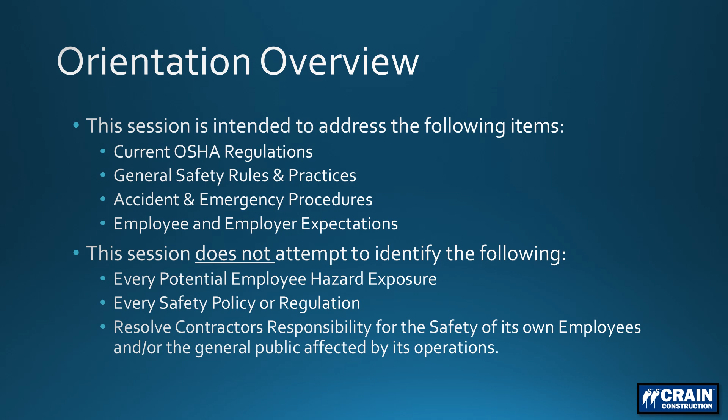Crain Construction has called Nashville home for over 90 years, and has completed over 4,500 projects in the greater Nashville area. Here at Crain, we believe every project starts with a strong foundation. One of the most important pieces of that foundation is safety.

Here at Crain, we believe safety begins at the top, but also involves a daily commitment from everyone working on our projects. Crain Construction considers accident prevention to be a key element of successful daily operations. Here at Crain, we strive to provide everyone on our sites with a safe and healthy workplace. We also expect everyone to participate in this process, by ensuring all operations and activities are performed in the safest manner possible, and consistent with quality construction, environmental safety, and best management practices.

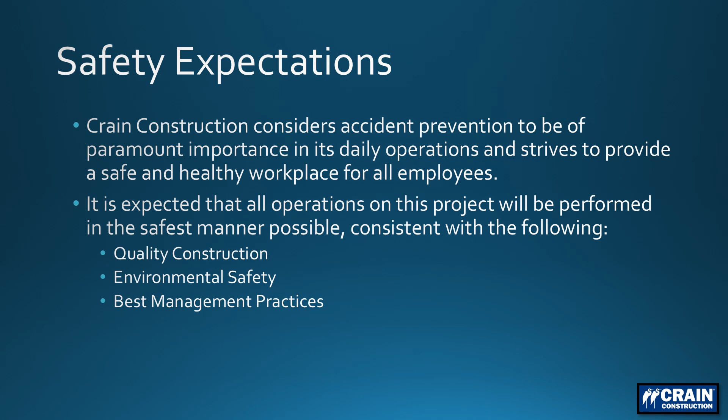Here at Crain, we have a term, achievable goal. We expect all of our employees to keep one goal a top priority every day when they come to work on our projects: achieve an incident-free work environment and ensure all employees go home the same way they arrived to the job site. The realization of this goal depends heavily upon you, the employee.

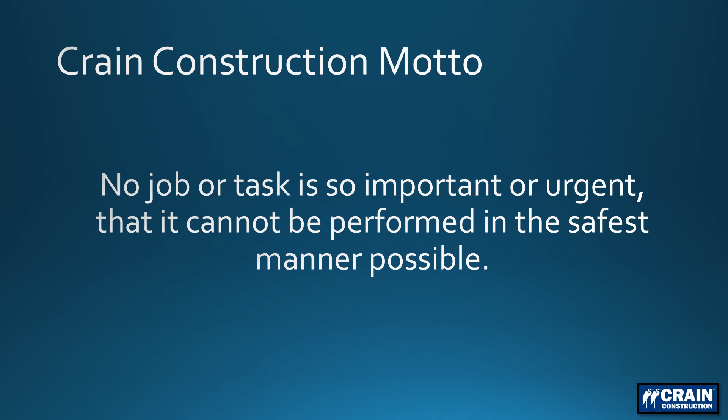You can help be a part of this goal through active participation, coordination, and cooperation with your companies, and Crain's safety and health policies. A commitment for safety starts with each of us, and here at Crain we have a motto: no job or task is so important or urgent that it cannot be performed in the safest manner possible. We expect all employees and management to incorporate this motto into their work, pre-task planning, and during their active work operations.

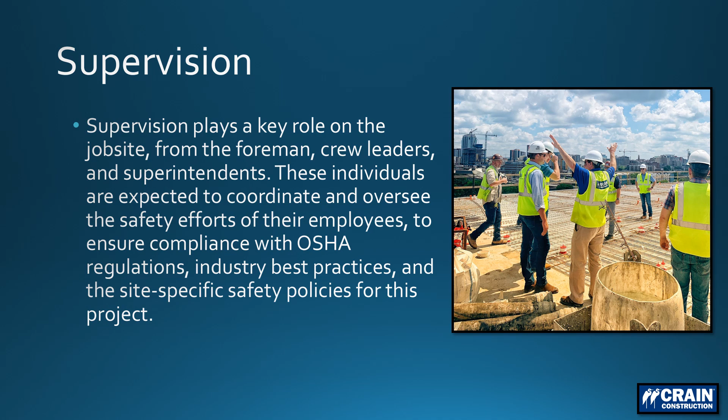Supervision plays a key role on the job site from the foreman, crew leaders, and superintendents. These individuals are expected to coordinate and oversee the safety efforts of their employees, OSHA standards and regulations, industry best practices, and site-specific safety policies for this project.

The next few slides will provide you with a breakdown of a few of the most common hazard areas we experience on a day-to-day basis. Although you may not be responsible for the implementation of each task, it is important that you understand the safety regulations involved, as hazards from other trades can impact all personnel on site.

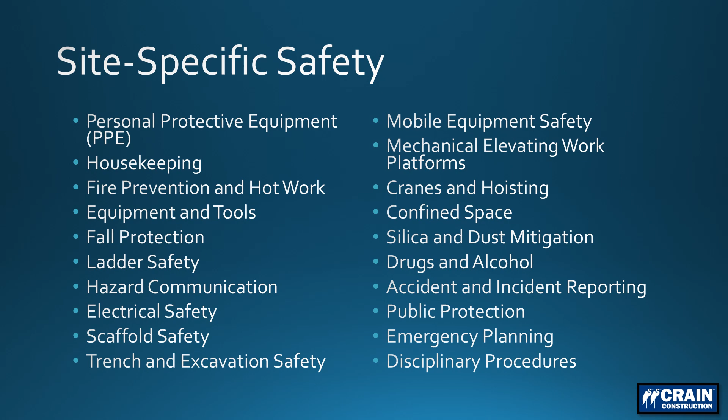Crain requires employees to wear the following items at a minimum while working on our job sites. These items reflect our sense of professionalism and industry-leading standards. Therefore, all employees are required to wear a minimum of long work pants, work boots, and shirts, with at least a 4-inch sleeve. Clothing illustrating wording or pictures that could be considered profane are strictly prohibited.

Personal protective equipment is a requirement while working on the project, and is an essential component to preventing our employees from being exposed to hazards. The minimum requirement for PPE on the project is long pants, work boots, high-visibility clothing, hard hat, and safety glasses.

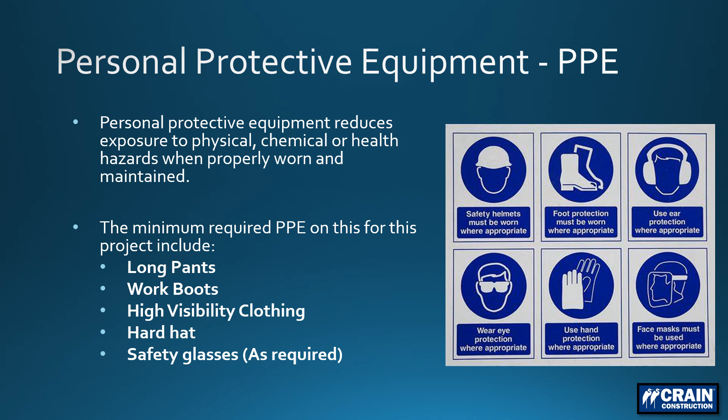Hard hats worn on the project are required to meet the industry head protection standards set forth in ANSI Z89.1. Hard hats are to be worn at all times by any individual entering the job site. No non-approved items are allowed to be worn underneath your hard hat. Examples include beanies or ball caps.

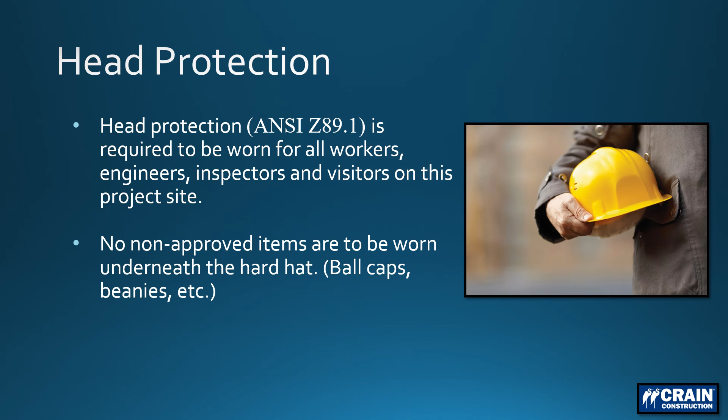Safety glasses are required to be worn by all individuals exposed to eye hazards. This eyewear must meet the ANSI Z87.1 standard. If employees choose to wear prescription glasses, they must meet the ANSI Z87.1 standard. These requirements include shatter resistance and protective side shields.

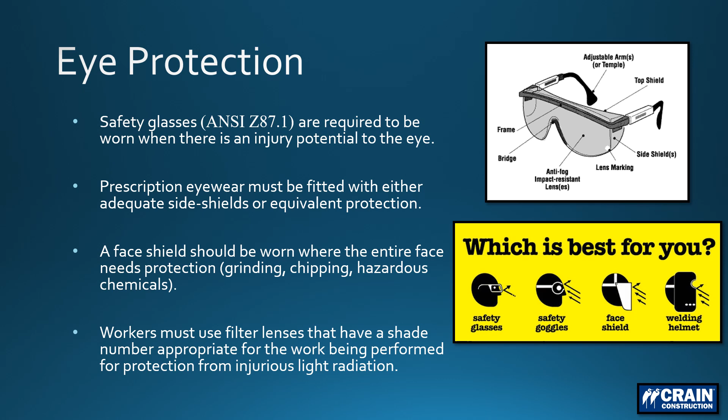If employees are working with items that could possibly strike the face, they are required to wear a face shield, along with approved safety glasses at a minimum. Examples requiring a face shield include grinding, chipping, or working with hazardous chemicals. Specialty work may require additional items, such as a welder's helmet. If you have a question regarding which type of face protection you will be needing, consult your supervisor.

Hand injuries are one of the leading causes of incidents in the construction industry. It is very important that employees understand the hazards associated with the tasks they are performing. Different gloves are used for different tasks. The most common types of gloves are broken down into 3 categories: nitrile, latex, and coated gloves.

Nitrile and latex gloves are best used for chemical hazards such as concrete burns, acidity, and other chemically reactive substances. Coated gloves have a wide range of uses, including cut resistance, shock absorbance, pinching hazards, cold weather, heat resistance, and electrical hazards.

Before performing a task, you need to ask yourself, what hazards am I exposed to? This question will help you pick out the right glove for the task.

Additional PPE can be required depending on the task being performed. Individuals performing specialty tasks should be prepared to use items such as earplugs, respirators, gloves, face shields, safety-toed boots, or additional class high-visibility clothing. These example forms of PPE are required to be worn by all employees working in or around warranting conditions. Additional PPE can also be required when directed by employer supervision or Crain management.

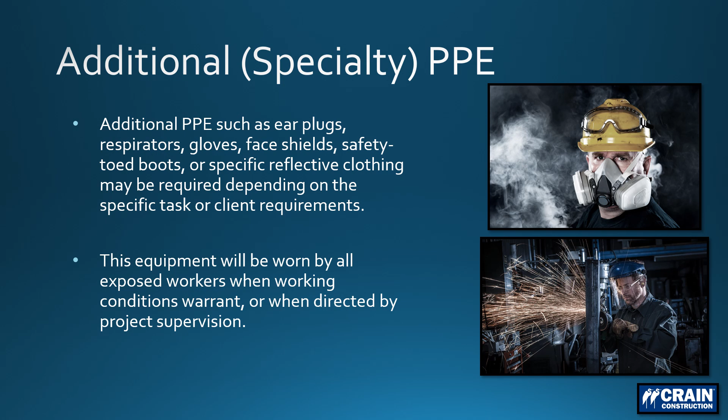In order to have a successful project, we have to keep our sites clean. At Crain Construction, work areas are expected to be kept clean to prevent hazards such as slips, trips, and falls. Trash, debris, and scrap materials must be regularly placed in waste containers or removed from the work area.

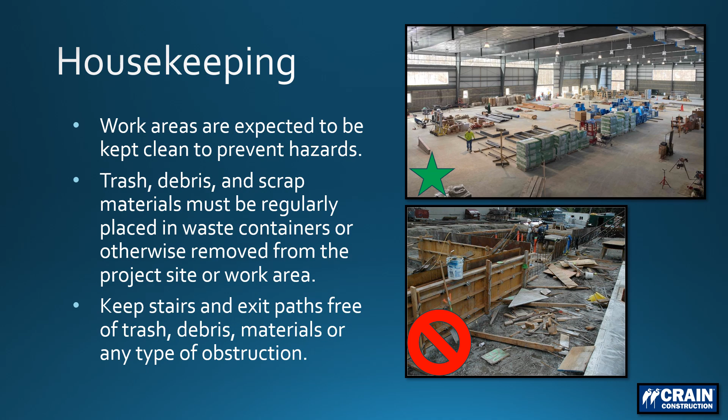Every employee on the job site is required to periodically clean up their work area and ensure all items are disposed of by the end of a shift. All stairs and exit paths are also required to be kept clear of any trash, debris, or excess material. We cannot accomplish this task without your help, so do your part, and take pride in your job site.

Fire hazards can present themselves in many forms, especially when it comes to hot work. Hot work is defined as any work that generates a spark or flame. Examples of this include welding, cutting, grinding, and tar kettles. Crain Construction requires that all employees follow our hot work procedure.

The proper procedure includes the following steps: 1. Notify management of hot work activities. 2. Complete a hot work permit. 3. Establish a fire watch. This individual must be dedicated to only performing fire watch duties. 4. Ensure a charged and inspected fire extinguisher is present in the area.

Additional questions to ask yourself before work begins include: what are my above and below hazards? Do I need multiple fire watches? Is my extinguisher charged and inspected? And finally, have I protected surrounding material and employees from hazards?

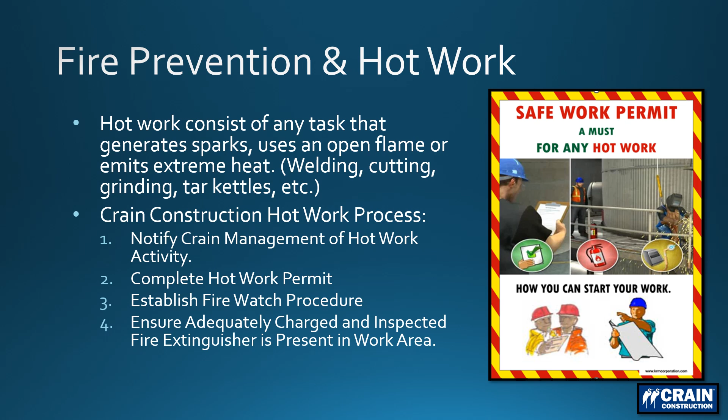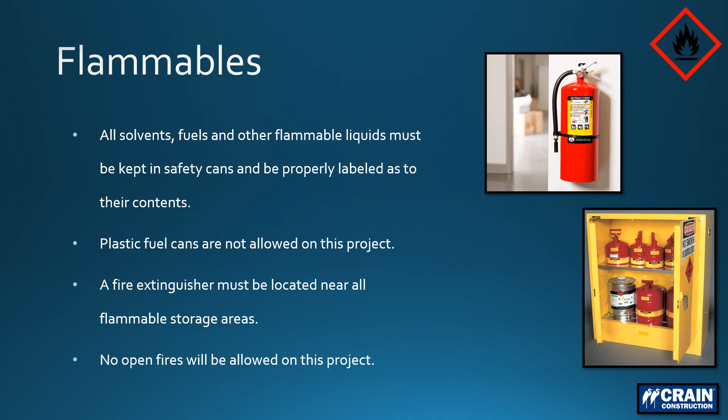Flammable solvents, fuels, and other flammable liquids must be stored in approved metal safety cans and be properly labeled as to their contents. Plastic fuel cans are not allowed on this project. If fuel is being stored on the project, a fire extinguisher must also be located within 30 feet. Crain will also not allow any open fires on an active project site.

Employees planning to use power tools on the job site must ensure they are implementing a well-thought-out plan before use. All tools shall be inspected before use to ensure they are in proper working order. If a tool is recognized to be damaged, it must be tagged and removed from service. Some tools can be repaired, but only when they are repaired by a qualified individual.

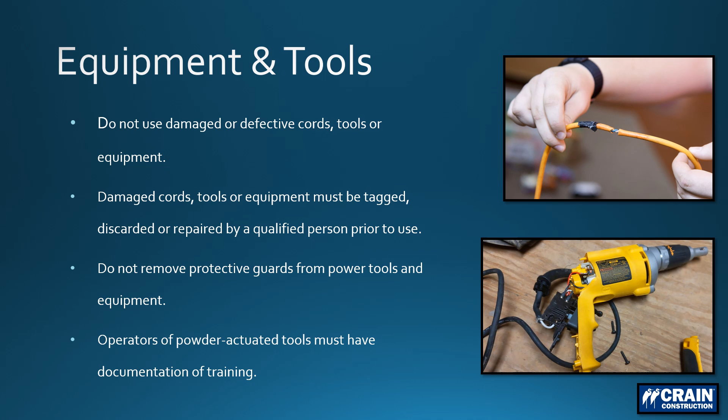No tools are to be altered or modified to perform a task. Individuals who plan to use specialty tools such as powder-actuated tools must also be properly trained and maintain proof of training while working on site.

Falls continue to be one of the leading causes of fatalities on construction projects. Workers performing activities at a height of 6 feet or more must be protected from falling by use of guardrails, safety nets, personal fall protection systems, or other approved systems complying with OSHA regulations.

Crain Construction has a zero-tolerance policy when it comes to fall protection. If employees are observed exposing themselves to a fall hazard, they will be removed from the project. This is a serious work hazard and every precaution should be taken, especially in the pre-planning phase.

Discuss this hazard in detail during your pre-task planning session. Supervisors should ensure that all employees at risk of a fall hazard fully understand the implementation of the fall protection system. If a fall hazard is recognized at any point throughout the day, you should secure the area from a safe distance and notify management immediately.

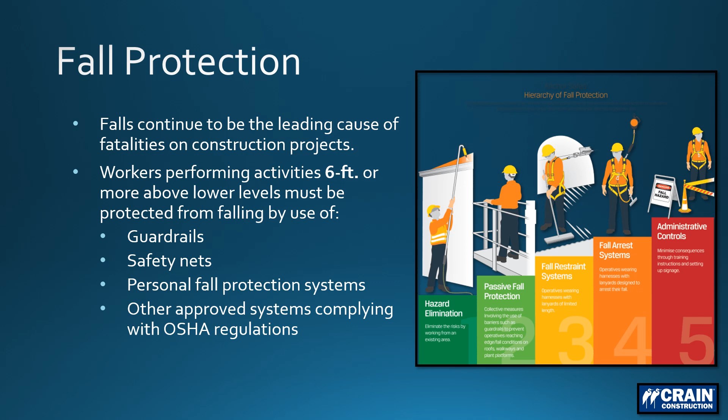Guard railing on our job sites will be constructed to the following requirements set forth by OSHA. All guard rails must consist of a top rail, mid-rail, and toe board. Top rails must be installed and maintained between 39 inches and 45 inches in height. Mid-rails must be installed at 21 inches. Toe boards at the floor must be at least 3.5 inches.

If wire rope is to be used as a guardrail, rope shall be at least 1/4 inch thick, with a deflection no more than 3 inches from the horizontal. Wire rope is also to be flagged every 6 feet. Guardrails are never to be removed without permission from a Crain superintendent or management employee.

Any employee found to have tampered with or removed a fall protection system without permission from Crain management shall be immediately removed from the project.

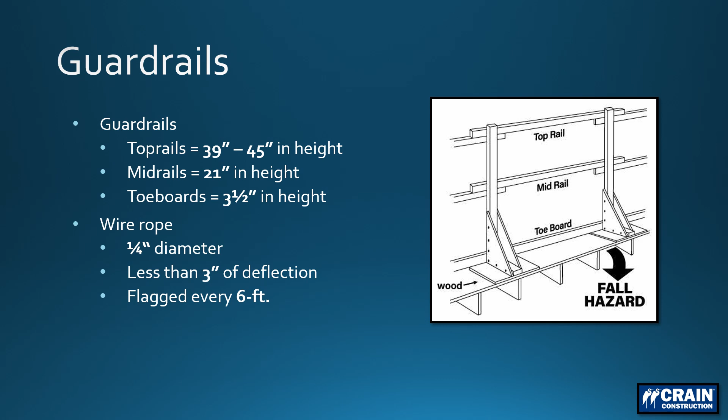In some cases, not all fall hazards can be eliminated from the work process. Crain recognizes that fall protection is an effective tool to implement but can also be dangerous if used improperly. When using fall protection, the first step is to ensure you have had proper training on what you are using. If you have not had training on the fall protection system you are attempting to use, you should not be using it to work on the job site until you have had the necessary training.

Once you have established training requirements, ensure you have an adequate anchor point. OSHA states you need an anchor point capable of withstanding a load of at least 5,000 pounds. Next, you will need to verify you have the correct lanyard or device for the task. The last step is to make sure all devices are given a final inspection. Anchors, harnesses, and connecting devices should be verified to not contain any excessive wear or damage before use.

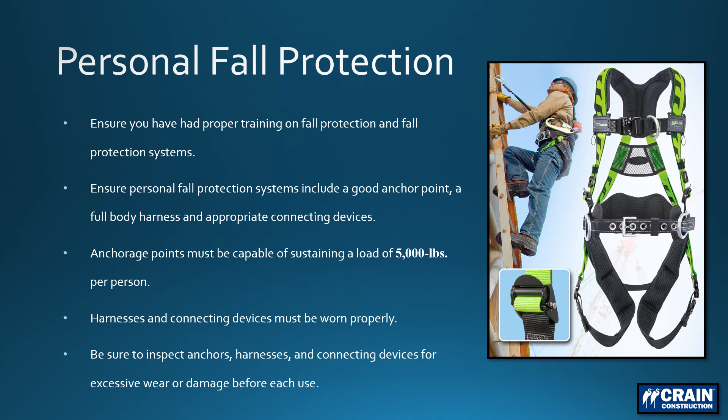Using fall protection equipment can save your life, but working to implement elimination items such as a guardrail or a hard barricade system should always be the main goal of all employees.

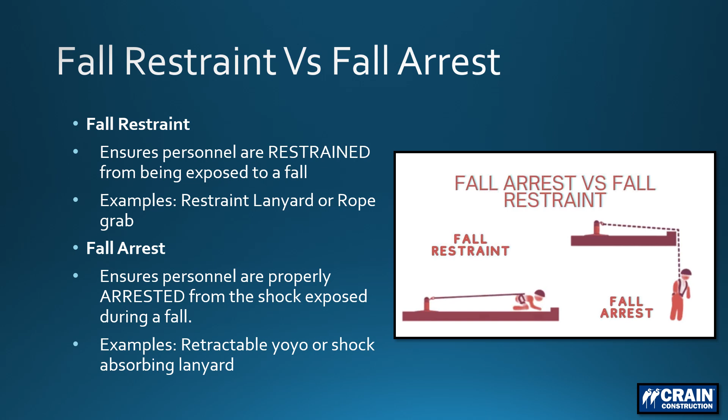Ladders used on the project are to meet the following requirements. Before you begin a task, ensure you are using the correct ladder for the job. For example, if you are working in a tall area, make sure you have a ladder that is adequately equipped to reach your working area safely. If you are accessing another level of a building, ensure you have an extension ladder, as A-frame ladders cannot be used to access other levels of a structure.

The next step is to inspect the ladder. Employees should always make sure the ladder is in good shape and has all of the necessary tags in place. Employees should never modify or alter a ladder's configuration.

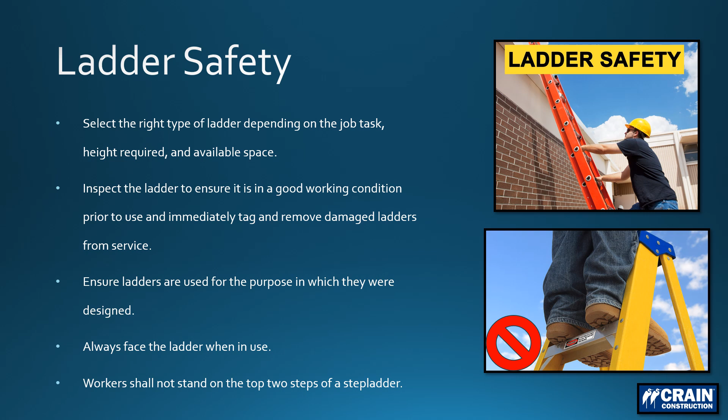A few final tips when working on a ladder: always face the ladder when working, and never stand on the top step or top cap of the ladder.

Extension ladders are a very useful tool, but if used improperly, can also be very dangerous. It is important when using an extension ladder to keep your body within the rails, to prevent accidental displacement. This is commonly referred to as the belt buckle rule. The rule states that an employee should never move their body too much in one direction as to take their belt buckle outside of the space between the rails.

Climbing an extension ladder should be done using 3 points of contact at all times. When traveling to another surface, an extension ladder must extend a minimum of 3 feet above that working surface, and maintain a 4-to-1 angle. There are also additional hazards, sometimes those we cannot see.

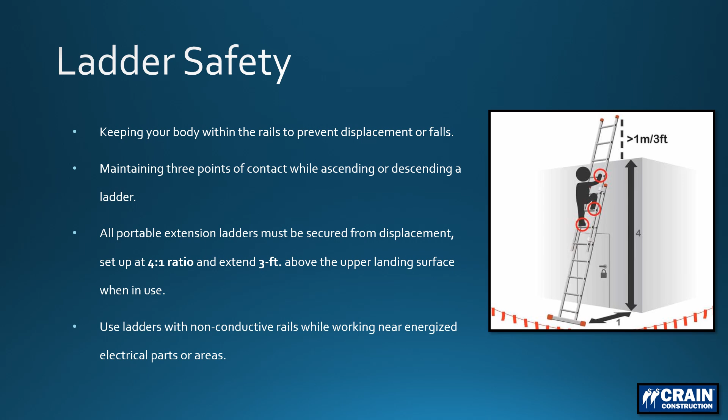It is important for all employees to pay attention to their surroundings before extending a ladder, especially when overhead electrical hazards are present. All ladders being used around electricity should be made of non-conductive material.

Crain Construction requires all of its subcontractors to employ ground fault circuit interrupters, or GFCIs, when using any electrical equipment. It is the responsibility of all contractors to ensure power sources have a GFCI incorporated into the system.

All electrical tools, equipment, and machinery must be inspected daily. If a tool is recognized as defective or damaged, it must be tagged and removed from service until it can be repaired by a qualified individual.

Electrical panels must be properly covered with no exposed energized parts. An example would be a junction box. If a junction box has energized wires, they must be capped, and a cover must be in place on the box. If work needs to happen on a system, employees need to verify that all energized parts exposed to employees are turned off and locked out.

Crain Construction has a zero-tolerance policy regarding lockout-tagout. Any employee found to be working on an energized system will be immediately removed from the project.

When working around items such as high-voltage lines, employees are required to keep a safe minimum distance and incorporate a warning system to the work area. There may be times where work on or around energized equipment is needed, but this must be coordinated with Crain management before work begins.

Scaffolding is a very useful tool and can be found on about any construction project. Safety when using these items is of the utmost importance, and Crain Construction expects all employees and subcontractors to abide by all proper safe work practices.

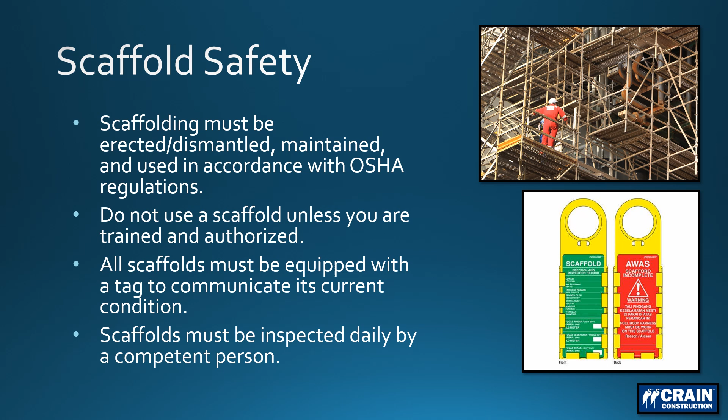Excavation safety. Before digging commences, all utilities must be properly located using items such as ground-penetrating radar or hydrovacuuming. If a utility is known to be near or in a trenching area, it must be located by hand before using mechanical means, such as an excavator.

Before working in a trench, the trench must be inspected by a competent person. The competent person shall determine the level of safety measures for employees working in the trench. The competent person is also required to inspect the trench on a daily basis, before employees are allowed to enter.

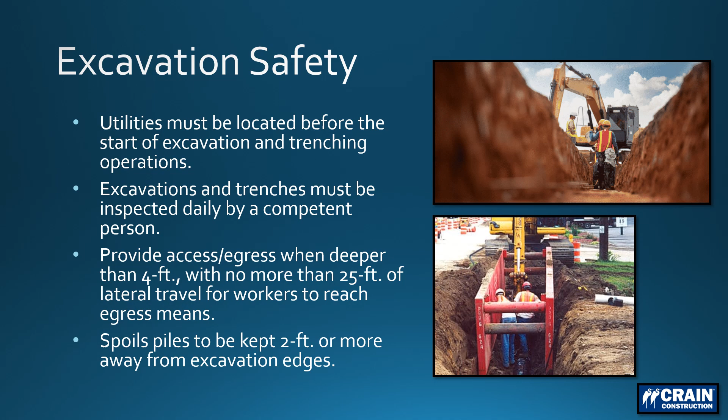Employees accessing a trench that is greater than 4 feet in depth are required to maintain access-egress points every 25 feet of lateral travel. Spoil piles shall be kept a minimum distance of 2 feet or more away from excavation edges. Excavation and trenching operations must be in accordance with OSHA regulations.

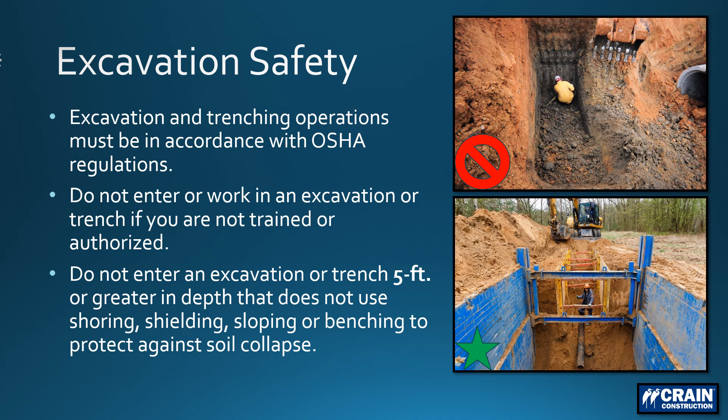Do not enter or work in an excavation or trench if you are not trained or authorized. Do not enter an excavation or trench 5 foot or greater in depth that does not include protective measures to prevent soil collapse, such as shoring, shielding, sloping, or benching.

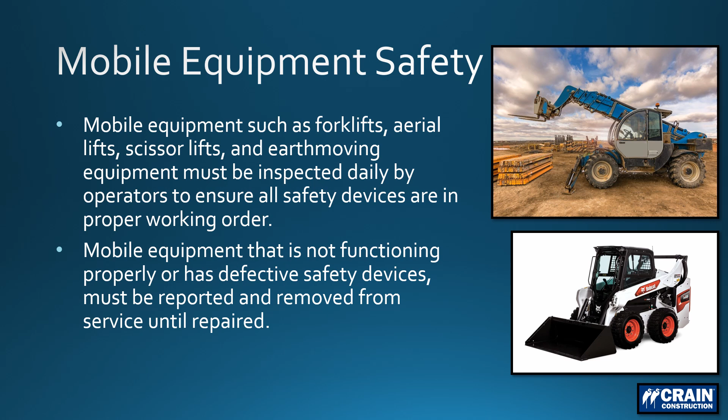Mobile equipment used on the site, such as forklifts, aerial lifts, scissor lifts, and earth-moving equipment, must be inspected daily. Operators are required to ensure all safety devices are in proper working order before beginning work. Any equipment found to be defective or damaged shall not be used until proper repairs can be made.

Forklift operators must be authorized by their employer and must always maintain proof of certification while operating equipment on the job site. Extreme caution should always be taken when working around mobile equipment. Employees planning to work around equipment should always ensure eye contact has been made between themselves and the driver before entering the operating zone.

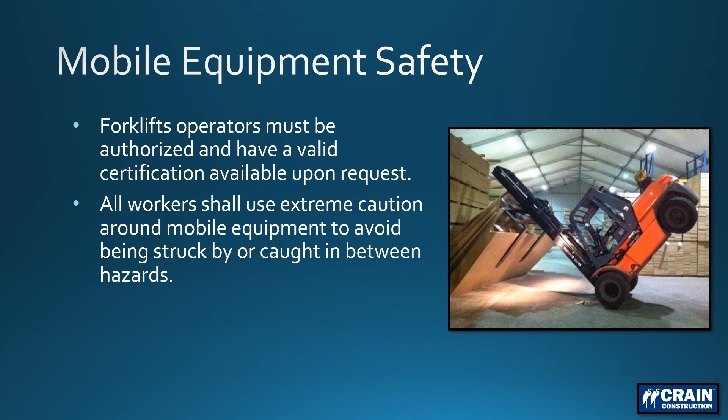Only trained and authorized workers shall be allowed to use mobile elevating work platforms. Workers must keep their feet on the floor of the platform at all times and are not allowed to stand on the railing systems. Before beginning operations, safety chains and gates must be latched in the secured position. Personal fall protection equipment shall always be used when operating a boom lift.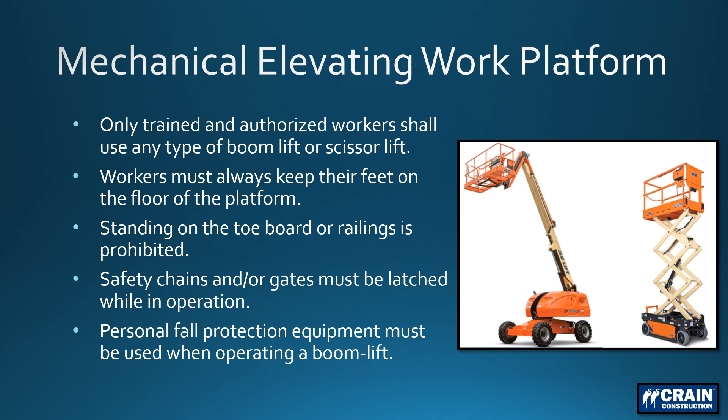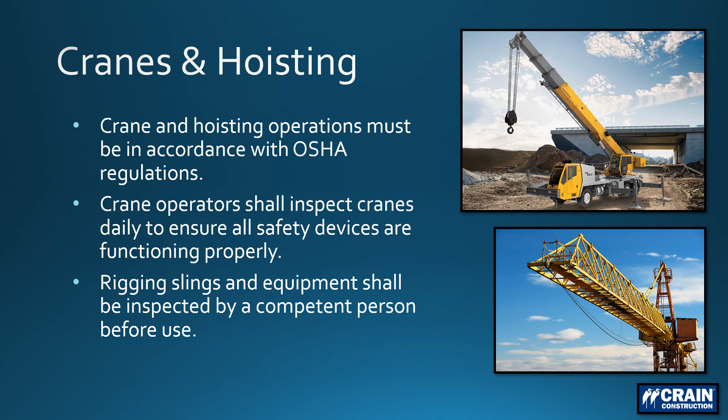All cranes on site must be maintained in strict accordance with OSHA regulations. Before a crane is allowed to work on site, the following minimum pre-construction criteria must be met. First, certification for the operator and crane designated for use must be provided to Crain Construction. Second, crane operators are responsible for inspecting their equipment daily to ensure all safety measures are met and devices are functioning properly. Finally, all rigging slings and equipment shall be inspected by a competent person before use.

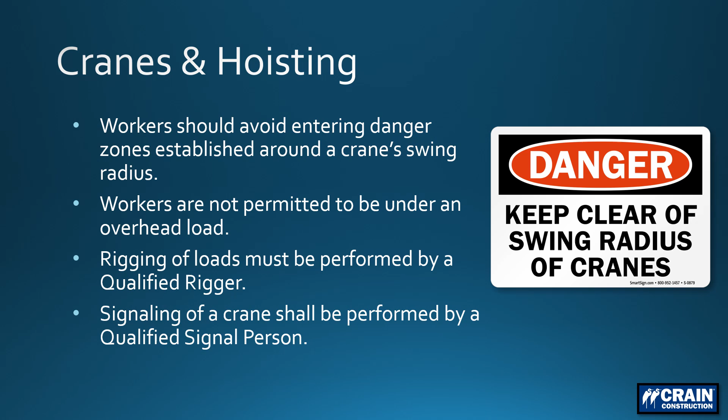Cranes and hoisting continued. Operators are required to set up work control zones to notify surrounding workers of hazard areas. Workers are never allowed to be under a live overhead load. All rigging of loads shall be completed by a qualified rigger. All signaling shall be performed by a qualified signal person. Proof of certification for both rigging and signaling must always be made available while working on the job site.

Confined space entry operations shall be in accordance with OSHA regulations. All confined spaces on site shall be deemed permit-required confined spaces until proper inspection criteria have been met. Only trained and authorized workers shall enter a confined space. Confined spaces must be evaluated daily by a competent person to ensure all existing hazards have been mitigated or eliminated.

Permit-required confined spaces shall have the permit posted in a readily accessible area during work operations. If employees are planning to enter a space, proper rescue procedures need to be in place, such as a rescue team or a tripod retrieval system.

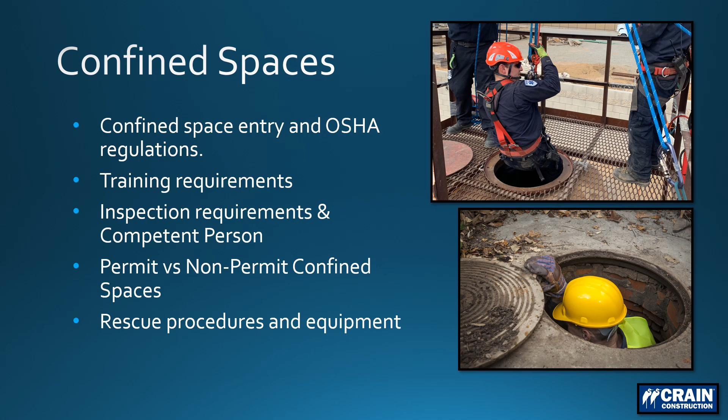All crews involved in activities which generate silica dust, such as concrete cutting, drilling, and grinding, must implement exposure controls to protect workers from airborne respirable silica. Employers can either use a control method described in Table 1 of OSHA's silica standard, or they can measure workers' exposure to silica and independently decide which dust controls work best to limit exposures in their workplaces to the permissible exposure limit, PEL.

Table 1 matches common construction activities with effective dust control methods, such as using water to keep dust from becoming airborne or using a vacuum collection system to capture dust. In addition to water and/or vacuum controls, some activities might require the use of respirators per OSHA's Table 1.

Employers who correctly follow Table 1 of OSHA's silica standard are not required to measure workers' exposure to silica from those tasks and are not subject to the PEL. Subcontractors are required to have a written site-specific exposure control plan when performing operations that generate silica dust on this project.

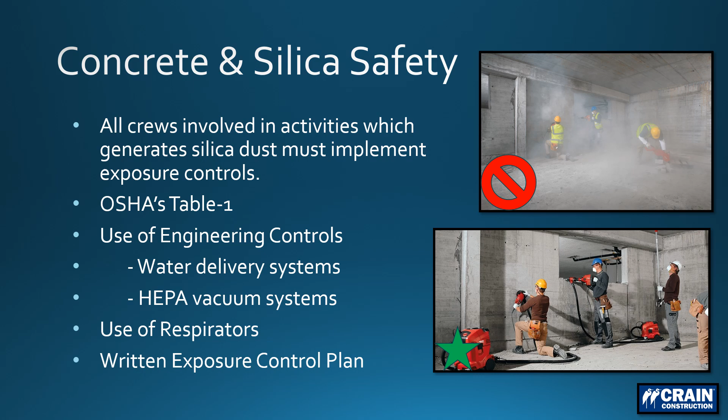Safety data sheets are required for all chemicals entering the job site. All chemical products on the site must also be stored in secure containers, and properly labeled with indicators of the product inside, and its associated hazards.

Contractor employees must not report for duty under the influence of any drug, or alcohol, or even legally prescribed drugs and medicines, which will in any way adversely affect their working ability, alertness, coordination, response, or adversely affect the safety of others on the project site.

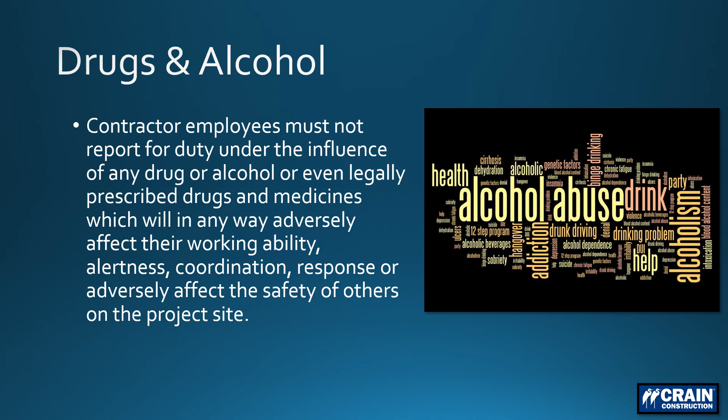Crain Construction requires every contractor to prohibit the use, sale, possession, or distribution of drugs when working on our projects. Crain Construction also reserves the right to test every employee involved in an accident, incident, or near miss.

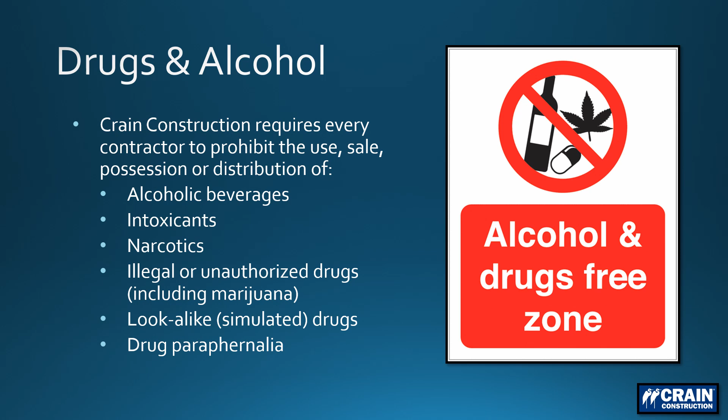If you observe any employees attempting to distribute drugs to on-site individuals, you should immediately report this to your supervisor or Crain management. All accidents, incidents, and near misses shall be immediately reported to your on-site supervisor, or Crain Construction project personnel. Our process of reporting helps us understand an issue, and hopefully correct the problem, before it happens again.

We want employees to understand they will never be reprimanded for reporting an incident. With your help, we hope to achieve a daily goal of 0 accidents or incidents.

All contractors and their employees shall take the necessary precautions to protect the public, the facilities, and the nearby tenants of the project, from any hazards generated during their scope of work. All construction operations, including the storage of materials, shall be isolated from the public, to the greatest extent possible.

We expect all employees on the job site to be kind and courteous. Items such as obscenities, vulgar language, and/or inappropriate gestures are strictly prohibited.

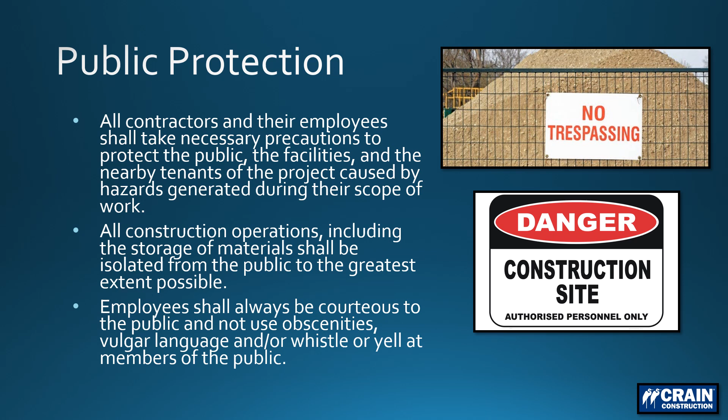Emergencies are not planned as a what if, but a when. All emergencies shall follow a simple 3-step process when you recognize an emergency. First, stop working immediately. Second, evacuate the facility or job site through the nearest designated exit point. Third, meet at the primary rally point for the job site.

If you are unable to reach the primary rally point for any reason, head to the nearest point where you are safely away from the hazard. Following these simple steps shall help ensure all employees are protected.

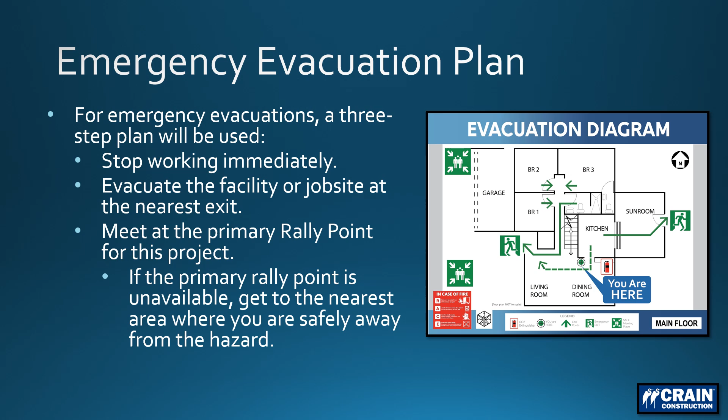Crain Construction expects its employees and subcontractors to conduct themselves in a manner that is consistent with the objectives of industry best practices and our organization's values. Our disciplinary action plan has been developed to ensure fair and effective arrangements exist for dealing with disciplinary matters.

Minor faults will be dealt with informally by way of advice, coaching, counseling, or training as appropriate. When conduct does not meet acceptable standards, the employee will normally be given a verbal warning by the supervisor authorized to do so. If the offense is of a serious nature, or a further offense occurs while a formal verbal warning is still active, a written warning will be issued to the employee by the appropriate supervisor.

If conduct remains unsatisfactory after the above actions, the discipline includes a 3 or more day suspension. If the employee still fails to meet the prescribed standards, or in the case of gross misconduct, termination of employment will normally result. Finally, the stages of the disciplinary process can be altered or elevated, depending on the seriousness of the offense.

If an employee commits an egregious or immediate safety hazard, Crain Construction reserves the right to immediately remove the employee from the job site.

In addition to our disciplinary policy, Crain Construction has established a list of inviolable rules, which if broken, can result in the immediate removal from the job site.

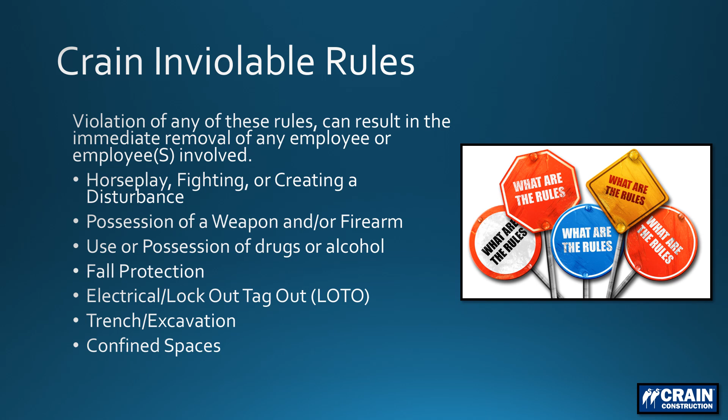These rules include, but are not limited to, horseplay, fighting, or creating a disturbance, possession of a weapon and/or firearm, use or possession of drugs or alcohol, fall protection violations, electrical/lockout tagout, trench/excavation, and confined spaces. These rules are in place to ensure all employees are protected from preventable hazards. We expect all Crain employees and subcontractors to follow these rules whenever working on our construction sites.

In conclusion, we are excited to have you starting here on our project, and look forward to having you help us create another leading-class building for our clients.

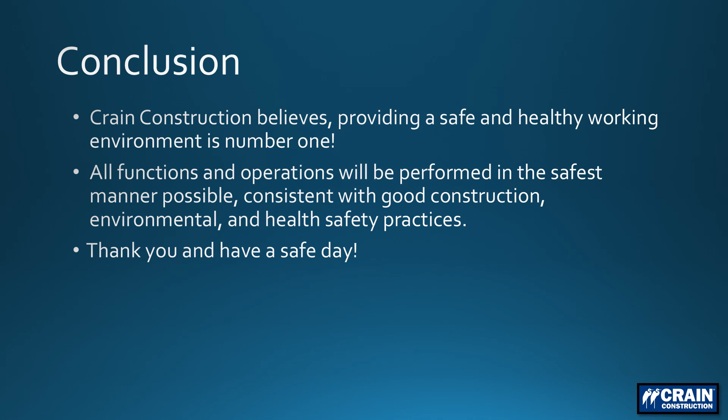Crain Construction believes in providing a safe and healthy working environment for all employees working on our sites. All functions and operations shall be performed in the safest manner possible, consistent with good construction, environmental, and health safety practices. We hope you have learned a little bit more about the general industry requirements and the expectations we have for everyone working on the project.